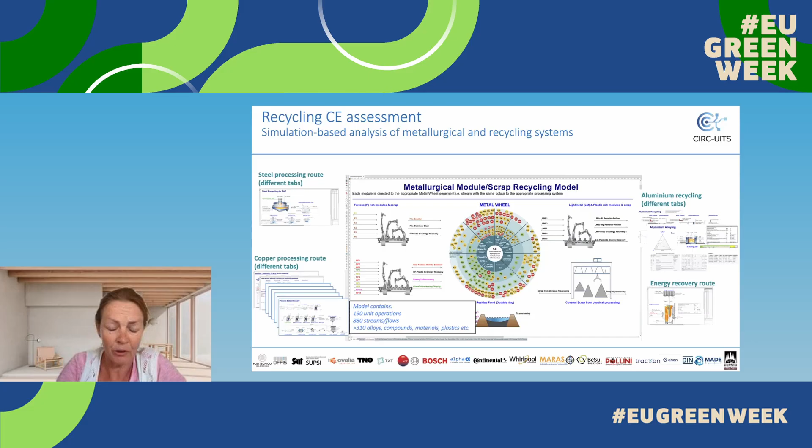I will not run this live because the model is quite heavy to run from a computational point of view. So I will show you some screenshots to give you an impression of what is behind the model. As I said, the model contains a wide range of different flow sheets. I only show a couple of them.

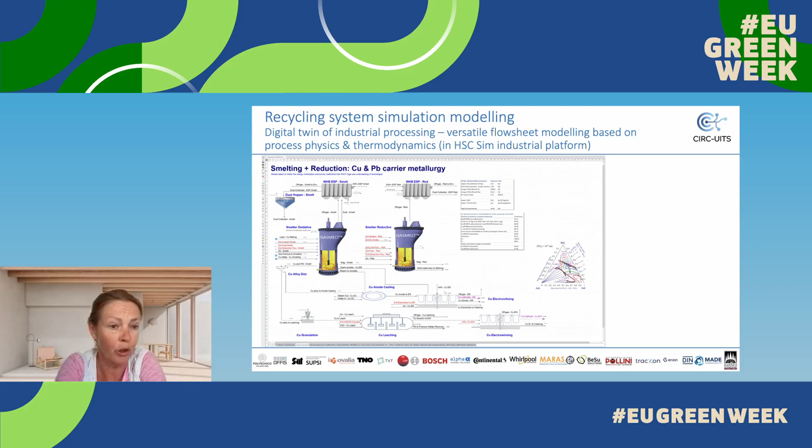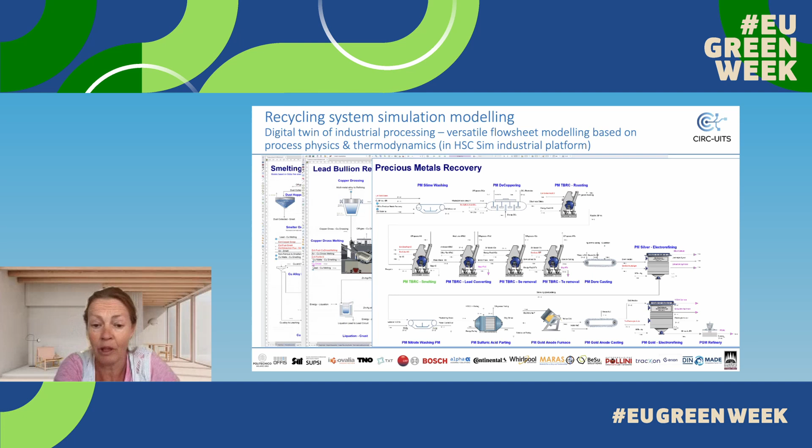This is, for example, the copper and lead metallurgy, the lead refining, but also the recovery of precious metals. Along with that, there are many more metals included in the model, as you saw in the metal wheel. It's based on industrial reality.

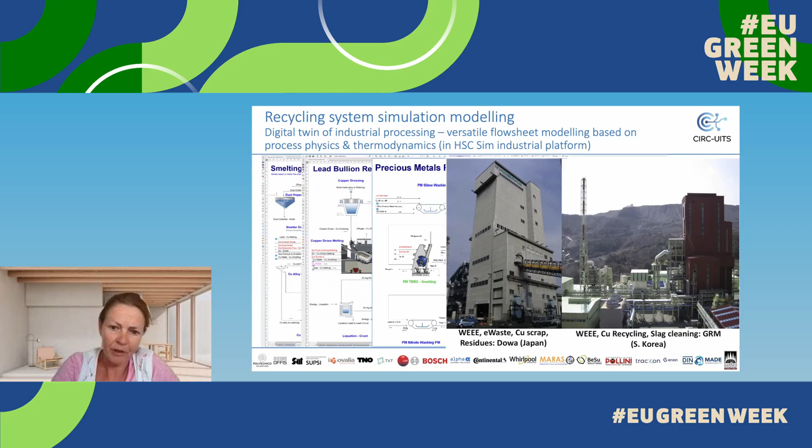So it's not just an academic exercise, but these processes exist in industry, and these have been modeled in HSC Sim. That's an industrial platform, a professional modeling platform, which is also used by my colleague, Professor Markus Reuter, not only to model plants, but also to design plants in order to perform bankable studies and also to build them in the end. So that's what is behind this recycling simulation tool.

Of course, when you look at these plants, as I said in the beginning, we combine both academic and industrial expertise in these models. The models are based on physics and thermodynamics of all processes, calibrated on industrial experience. We're not using plant data for two particular reasons. There are many models which take split factors, for example.

Also, if you look at shredding and sorting, the model is also expanded with that part. I'm not showing that now. On the one hand, we do that for plant confidentiality reasons, but the other reason is that every product has its unique recycling performance and its unique recycling infrastructure, fingerprints, and split factors within the processes, which can only be well captured and described with physics and thermodynamics, and not when you take a fixed average rate and put that into a model. So that's the clear reason for that.

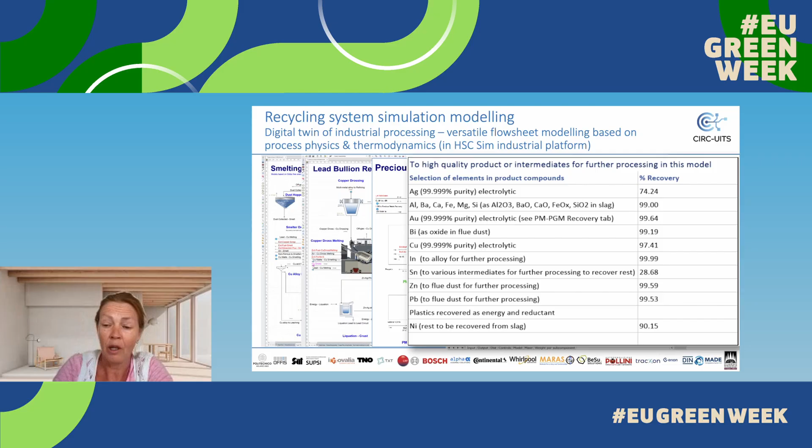What are the outputs of the model? Recycling recovery rates - this is coming directly out of the model. And then many others, which I will not show now, but would like to demonstrate more in the demo we performed within this project. And I'm taking the demo for the Bosch ECU design.

Bosch had some particular questions for the end-of-life assessment: of course, the evaluation of the recycling performance, the circular performance of the product at end of life, comparison of different designs, what kind of recycling rates can be achieved, so the provision of recycling KPIs, but also what can be used as design-for-recycling feedback from the recycling assessment, and also what are the best recycling options to recycle the ECU design under consideration.

And what if we look at the design itself? Is further dismantling into subcomponents beneficial in view of recycling, yes or no? And also, how can we balance repair? Because the CIRC-UITS project is also about repairing with recycling. So these were the questions by Bosch.

Let me take you step by step through some of the outcomes. This is the ECU design, and if we look at recycling assessment, the first step in that is data processing. We need to make the link between the beginning of life and end of life. So that's the first step we do within the recycling simulation tool.

It's making the link to the bill of materials and full material declarations as provided by the OEMs and the partners in this project, or any other partner for which we do these types of assessments and consultancy actions.

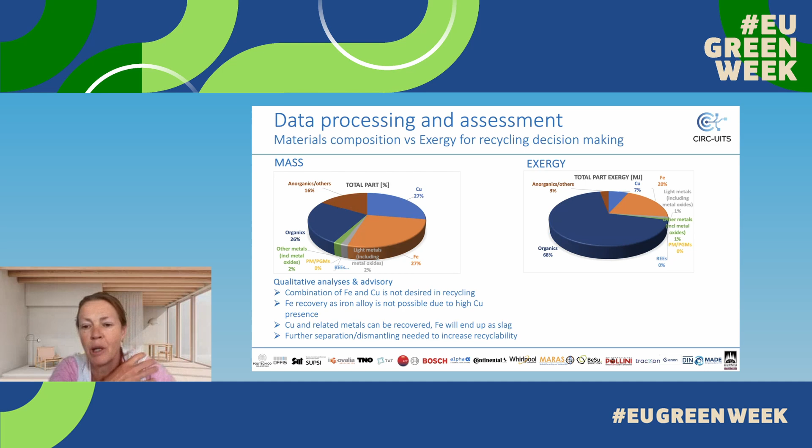It accounts for the dissipation of energy during production, but also during recycling, and the dissipation of material quality. So what we did is, in the model I showed, there's physics and thermodynamics, we can also do an exergy balance. And if we look at the material from an exergy point of view, the focus is suddenly very different.

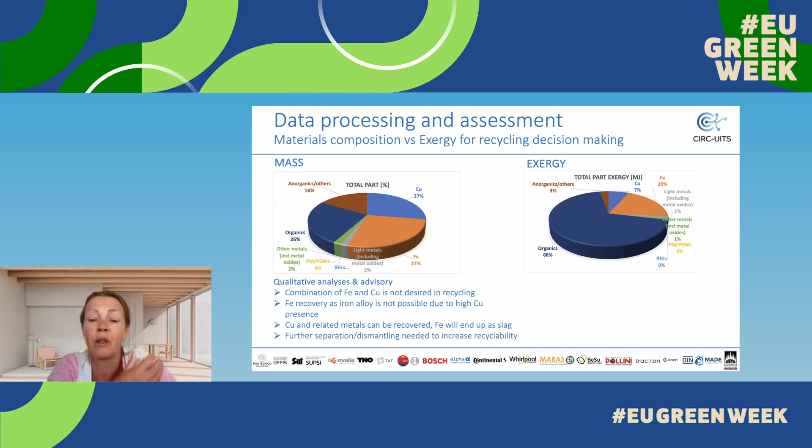We see a high focus and a dominance of the organic parts. That's because the organic parts are far away from the standard state material as we find in nature, and it takes a lot of energy and exergy to produce them. So we like to maintain that. This changes, or might change, the focus of recycling, and we need to maintain organics when recycling this.

Then as a next step, we can also focus on the recycling of the metals, because of course, due to legislation, we also need high recycling rates. This is just to indicate that there are different ways to also look at recycling.

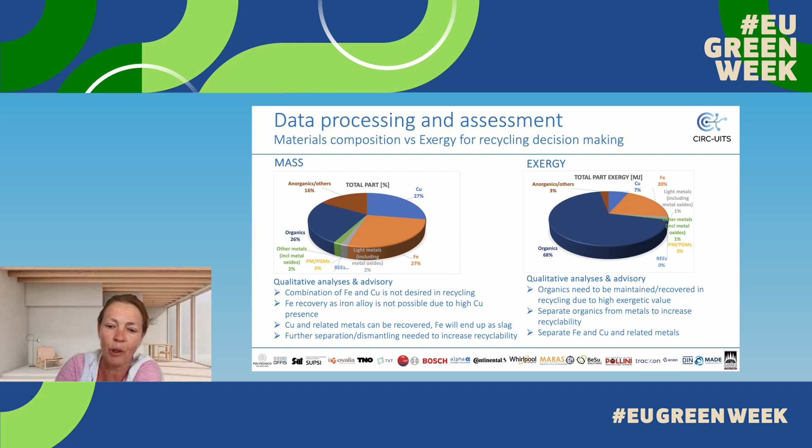As Bosch asked us also to provide feedback on repair action, the exergy content of the part is also predicting effective focus for the repair action. So we also provided the exergy values to Bosch, and they're using these values in their repair assessment.

Of course, a clear outcome of recycling assessment are recycling KPIs. On the one hand, we can look at the material or the total recycling rate of the product, but also at material recycling rate. We do that at three different levels, which you see here on the left-hand side.

If we really want to maintain circularity, we need high quality, so that's the top one, and levels 2 and 3 are the lower quality materials. We split the recycling rate up accordingly.

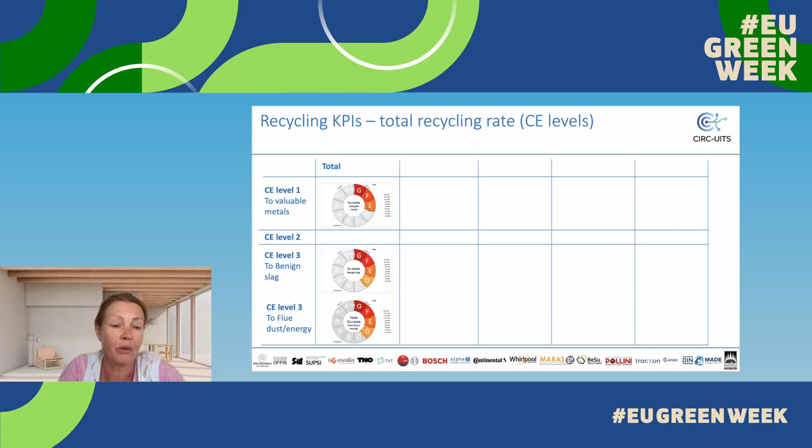As I said, Bosch is also looking at dismantling. This is the total part, but we can also predict recycling rates if we have, for example, a first dismantling step or a second dismantling step.

So for every stage and for every part or subpart, we can do this recycling assessment, not only looking at the total recycling rates, but also at the different materials. And here you see a selection of the materials.

And if you look carefully at the different dismantling steps, you will see the colors and the bullets changing in the inner circle. And this can help with decision making.

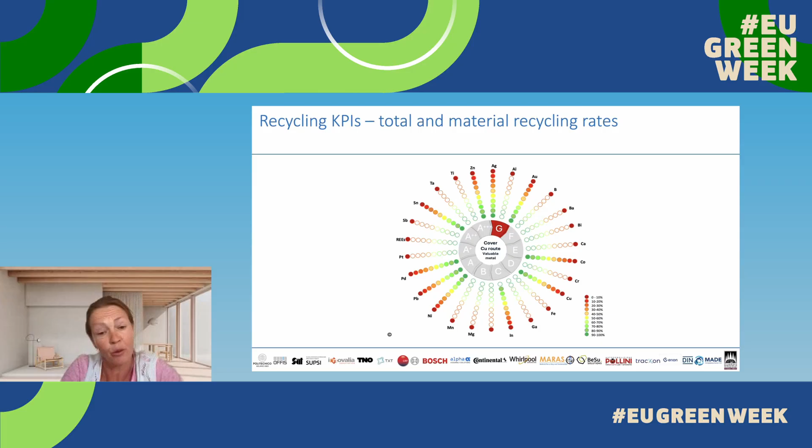To what extent will I dismantle? Which materials do I recover? And where can I find the best balance? Not only by looking at dismantling, but also by comparing different recycling options.

As I said, there are two different ways to look at recycling. The standard way is mass-based. That's the basis for recycling rate calculation, which is what you see here.

So all flows are modeled based on their mass for all different materials, as I showed in the beginning, which are present in the design. So we can trace every material throughout the entire flow sheet, and also predict where the losses occur, what type of emissions occur, etc.

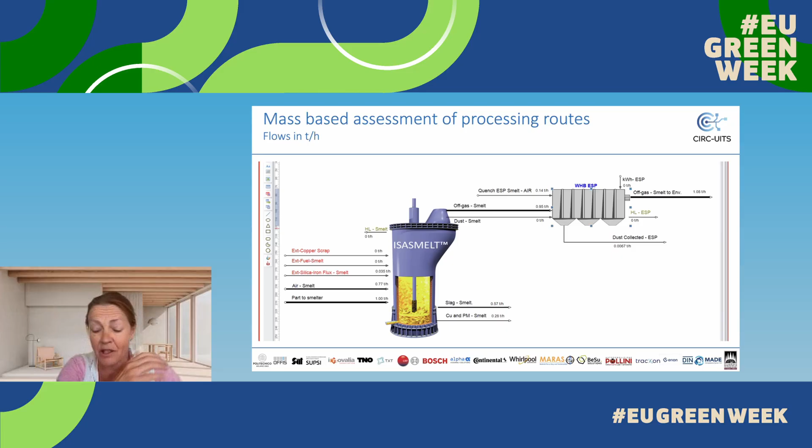We can also do that based on exergy. So you see the values changing from ton per hour to exergy values. The nice thing is that we can also quantify the content of the product in terms of exergy, as I showed in the beginning, and then also look at the effort of the processes.

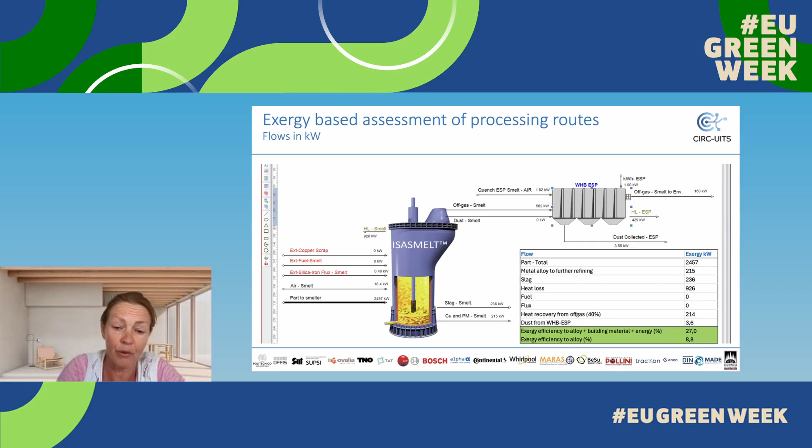Does it still make sense to recycle a product or a material, or to add additional recycling steps? We do that based on the exergy efficiency. That's a second denominator to quantify recycling performance and support decision making in what recycling options are best, where should I focus recycling on, where do I stop, and where can I still find benefit. This is, of course, also related to LCA.

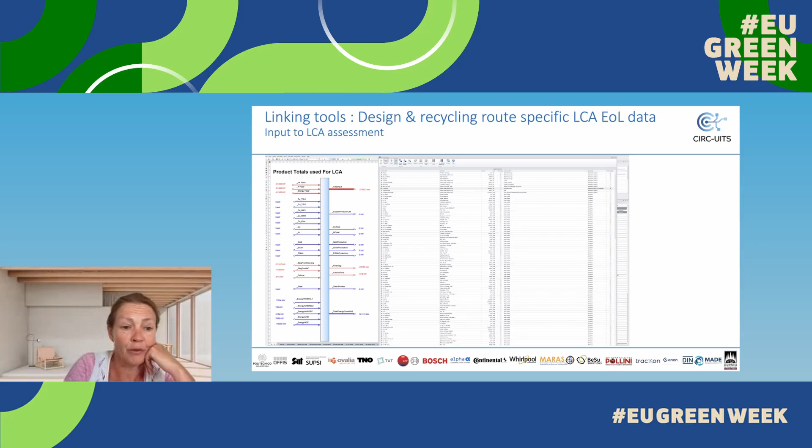But as I said in the beginning, recycling is a unique fingerprint figure of a product, a design, or a recycling route. This approach and these tools allow us to quantify also the LCA of the end of life for each unique design and recycling route. And we link that up and provide that type of information also in this project, for example to SUPSI.

Through OpenLCA. That brings me to my last slide, just to give you an overview of the features. We link design through data processing with the digital twin of the recycling simulation of the recycling industry, predicting different KPIs.

Also circularity indicators, of which exergy is a very new and innovative one, which can express everything in the recycling system in one denominator. So not only having to compare mass and energy, but we can bring that all together in exergy, and can also provide end-of-life LCA figures.

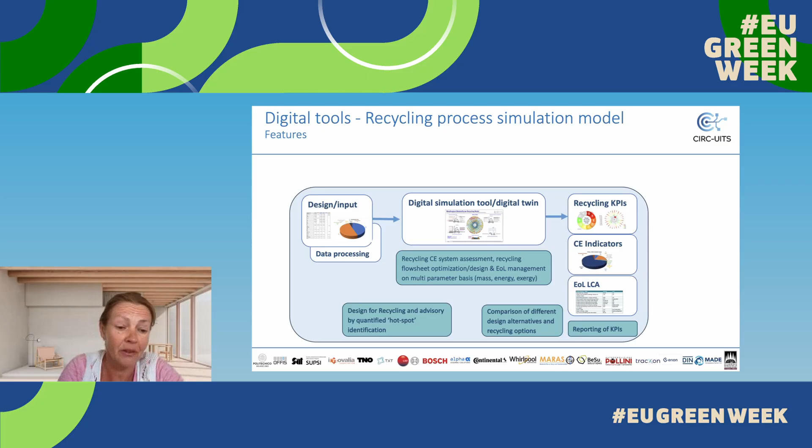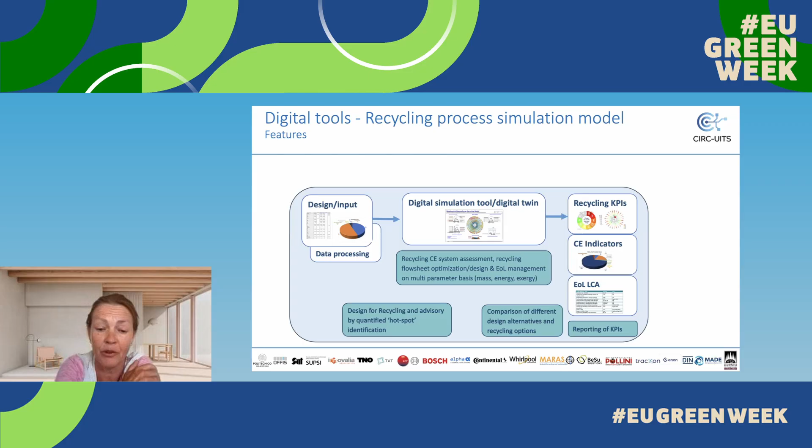What can we do with it? System assessment, recycling flowsheet optimization, end-of-life management of products on a multi-parameter basis. We can provide design for recycling and other advisory by hotspot identification in the design. Where are the problems? We can compare different design alternatives and recycling options, and of course provide KPIs.

And within this project, we also link it to other external databases and platforms. Mattia presented in the beginning the Circularity platform. We can capture these models in neural net models.

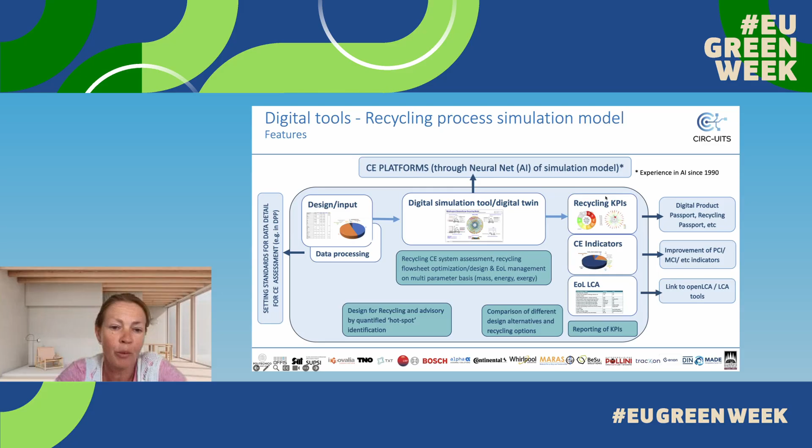That's what we're busy with. We have long-term experience since the 1990s in AI, in order to have fast calculating options. That's what we perform within the Circ-uits project also. We can link to the digital product passport, recycling passports, existing circularity indicators linked to OpenLCA, and also provide the basis for setting standards, as being done, for example, in the CWA within this project.

That closes off my presentation. I'd like to leave you with some references for further reading, and thank you for your attention.